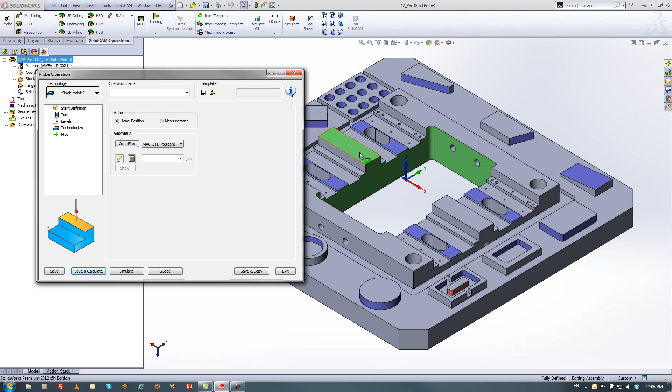In this session, we'll be showing you how to create a home position using the Z touch point and the inside pocket points. We'll go to our probe operation, and to touch off on our Z point, we will have to touch off on these areas over here. Now, before we continue, let me just show you the part itself.

If we take a look at the part, you'll note that I have certain parts colored in certain different colors. For example, I have this area here and this inside pocket over here colored in green. These areas I will be using to create my home position. Whereas these areas over here, marked in blue, I'll be using later on to actually do a measurement on the part itself.

Now let's start off with doing our home position. Our home position will be based on the upper level over here, touching down on the Z, and working inside this pocket to have it at the center of that pocket. So what we'll do is as follows. First of all, we'll start with the single point Z. And of course, since we are creating a home position, we are using the option of home position.

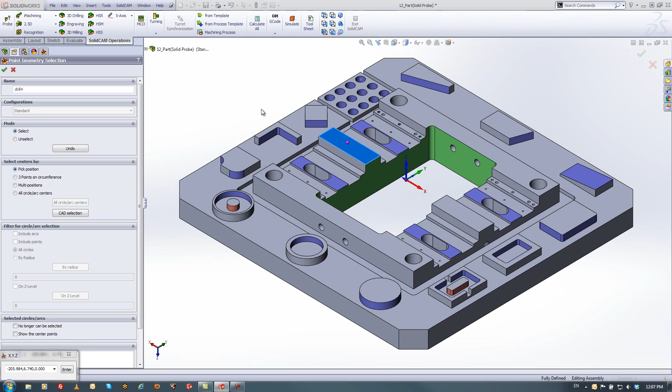Now, if I just click inside this field over here, you'll note that the picture on the side shows you exactly what you have to choose for your geometry. In this picture, for example, you can see that we have to choose any point on that particular surface. So I'll go into New and simply touch this surface over there. As you can see, a point has been created on that surface. I'll click on OK to accept it.

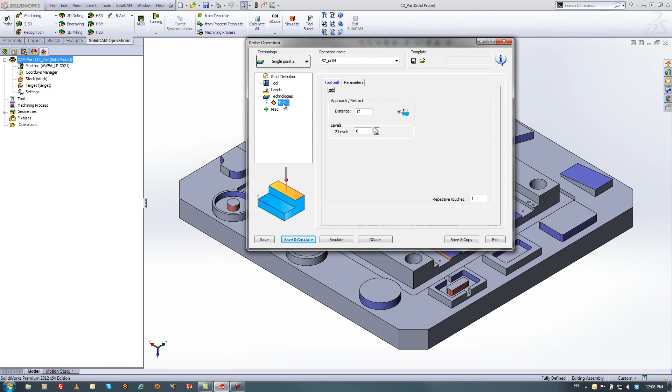Go into Tool, and I've already created a tool over here for my probe, so I'll choose that particular tool. My levels has my clearance level. And now let's go into our technology. In our technology, we don't see anything here on the part itself, but we have here a window for preview. If I click on the preview, and I'll zoom into that area, it's showing you exactly where it's touching down and how it's going to touch down.

We can change our approach and retract distance over here by writing a number, say 15, or I can just turn the wheel on my mouse, and the numbers will change as well. So I'll leave it at 15. As far as the Z level goes, we can either touch on the surface itself or write in the value over here. In our distance Z, I'm going to change it back to 10, because I don't really need it going above my retract distance. Now we simply do save and calculate.

Let's take a look in our simulation at exactly what happens when I use the probe. You'll see that the probe will just come down, touch off the part, and go back up. To continue, all I have to do is click on Save and Copy. When I click on Save and Copy, I'm in a new operation.

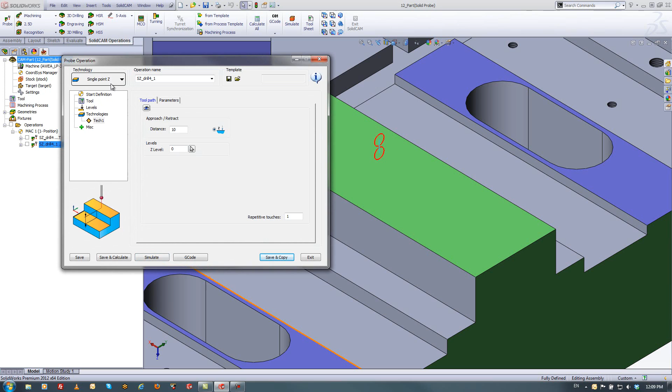This time, instead of single point Z, I will choose the option of Pocket. Create a geometry for this. I'll just use the simple rules, just like we do in any pocket in SolidCAM. Click on the edge over there, close that chain, and there we have the pocket. The tool is the same tool, and in my technology, again, we have our approach distance. And now we have, as before, our preview.

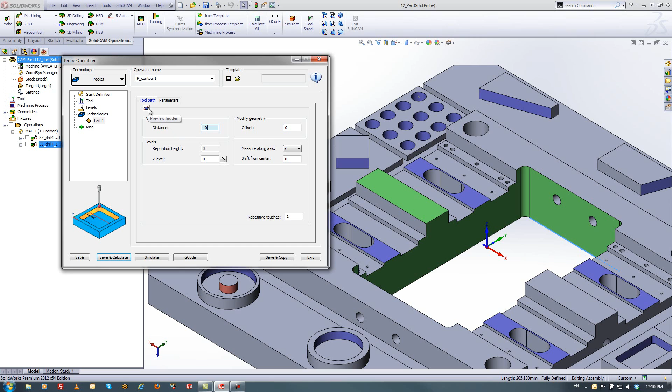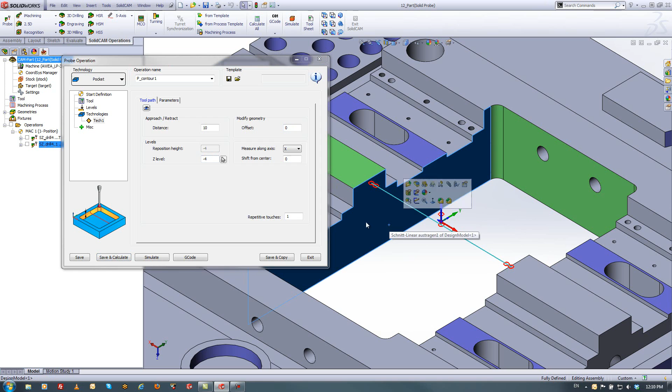The preview is showing exactly where it's measuring in these areas over here. You can also see the approach distance, and we have here the Z level. If I turn my wheel, the Z level will move up and down. I can also click over here and click on the part itself, and it'll easily move down to the level where I want to measure my Z level. I can also write in any value I want. For example, I can write minus 30, and it'll jump to 30 millimeters.

We also have our measure along. Right now, it's measuring only in the X direction. If I open this, you can see we can measure in the Y direction, or we can even measure in X and Y together, getting the exact center of that part. Let's do save and calculate.

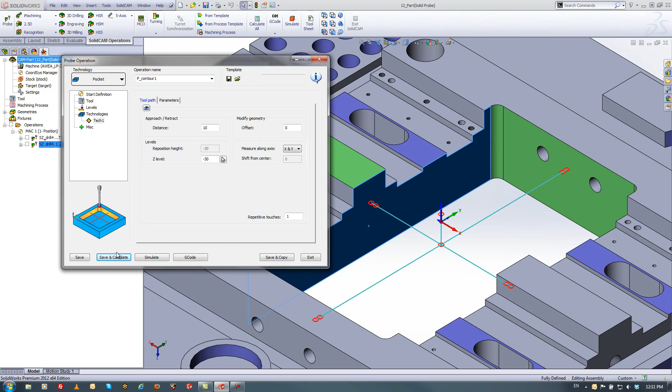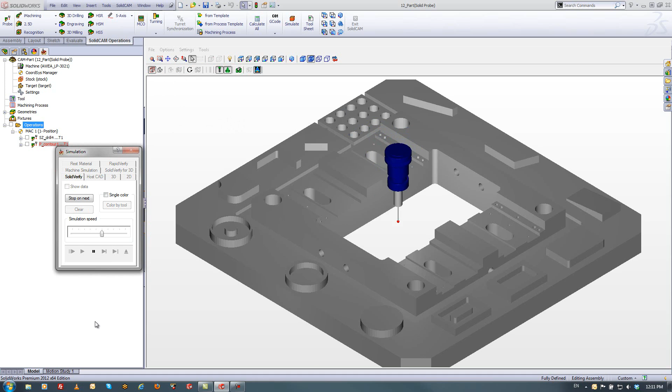Now let's take a look at the simulation, and this time on both operations. You'll see the first one, and I'll zoom in and slow this down as well. The first one comes down, and then the next one goes towards the middle, touching off on each one of those edges, both in the X and Y direction, giving us the center of that pocket as our home position.